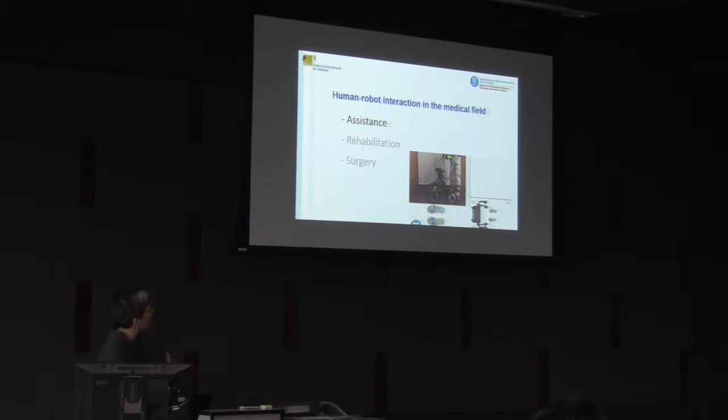For example, in assistance we have to deal with an external robot being an assistant arm that assists people in daily living, or other kinds of robots like wheelchairs or a smart walker that assist a user, elderly or so, to just go around. In rehabilitation...

the interaction is much closer because there is quite complete physical contact, mainly in this kind of exoskeletons, between the human and the robot, whose goal is that they cooperate. It's a cooperative task because we expect that the robot doesn't do everything.

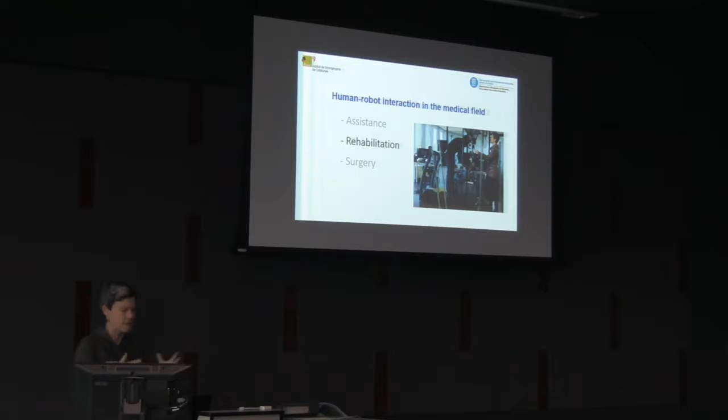We talk about exoskeletons, treadmills, or a combination of all of these with support for weight compensation, etc. All the things that exist in cooperation.

In surgery there are different problems, of course. For example, in this case we show robotic or laparoscopic surgery. Here the interaction is directly physical, the robot with the patient, or the instruments with the patient, but also the surgeon that is controlling the robot for the task. So there are two different kinds of interactions.

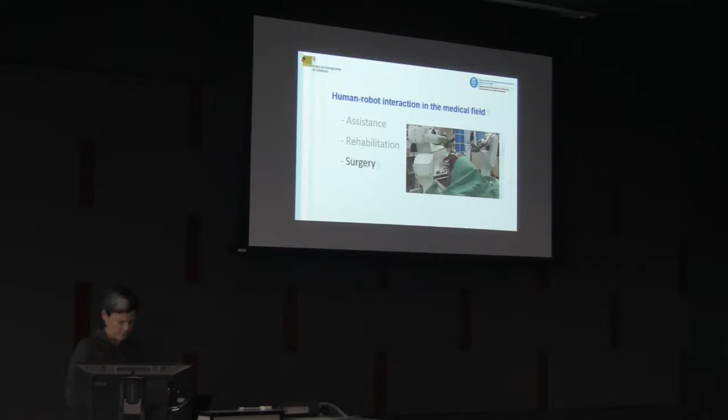So in this case, what is shown here is a lab scenario of the slave robot doing this laparoscopic task, operated by the surgeon. So we'll focus on the robot control aspects that we have to deal with, which are different from the more classical problems in robotics.

Just giving rough ideas: one is positioning, because many tasks are just about positioning the robot at some point. Others have to follow a trajectory, so trajectory guidance is key. And in other cases when we have contact with objects or with humans, there is the concept of force control.

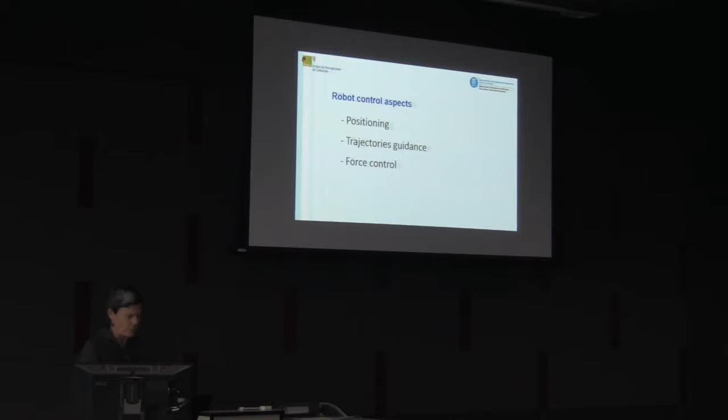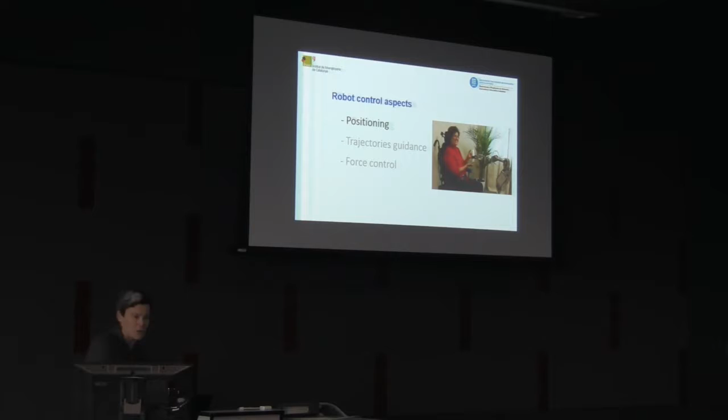If we focus on the other applications we mentioned, in assistance we have to deal with the user of this application. In some cases the robot is approaching something, and in most cases the user can facilitate the task because he can approach the robot. But in other cases this is not the situation: the disability may impede the user, or the user may even move meanwhile, so the robot has to adapt to the specific positions and situation of the patient.

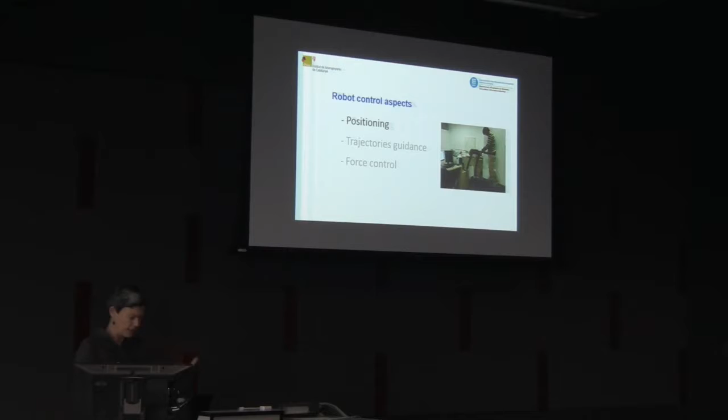In this case of rehabilitation, we have a user on the treadmill. This is a robotized treadmill that adapts the speed to the advancing speed of the user, so we have to detect precisely and continuously adapt to this capability of the user.

What is the problem of positioning in surgery? There are some applications in which we can predefine the position of the patient, like in stereotaxis applications, for example in brain or head interventions, where we can fix the position. So once we have established and calibrated the system, we know always where the patient is.

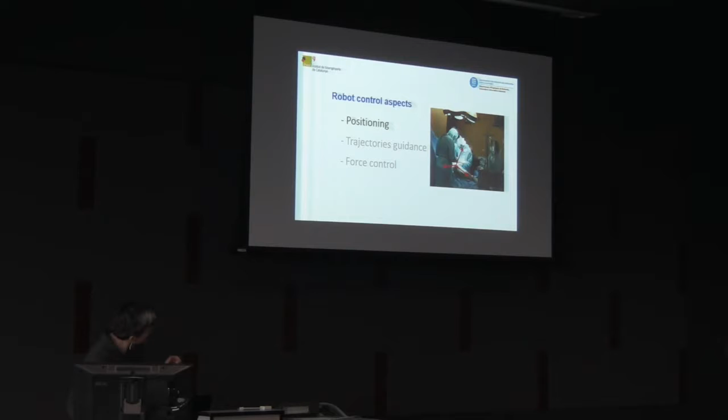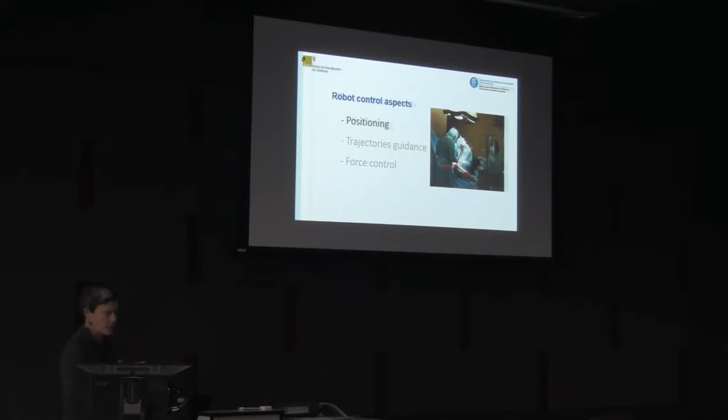The axis, in this case the leg, we cannot fix the position, or if we can, it's some invasive action fixing the position of the arm or the leg. So as much as possible it has to be avoided because it has shown to have clinical consequences later on. So there's still challenges in robotics to continuously and in real time position, to know, to detect the position and orientation of the patient, to be able to perform it. So we cannot.

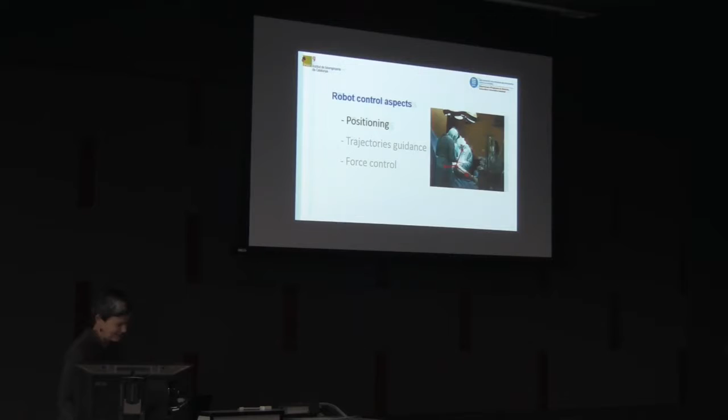So when one refers to trajectory guidance, again, it's the same thing. Referring to industry, coming back to welding actions, before was point-to-point welding, now is arc welding that needs a trajectory. In this case, either because the trajectory is quite established, or we have perception systems or vision to detect the joint, it is clearly defined.

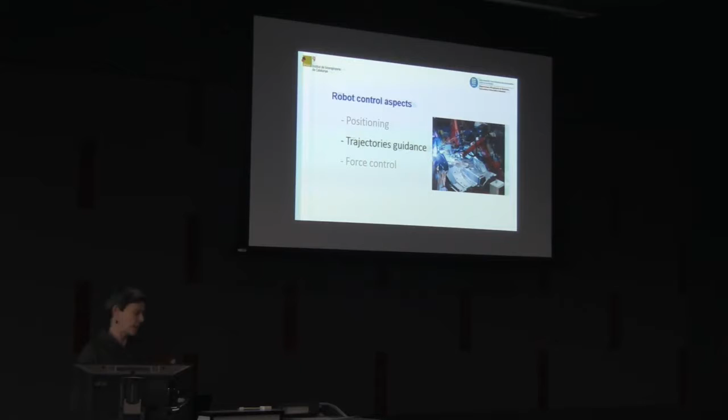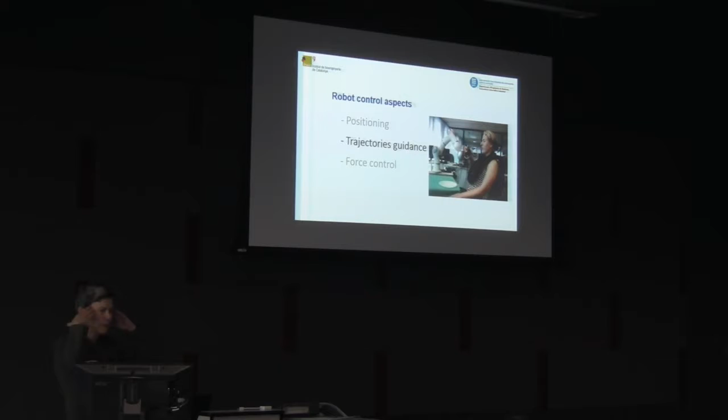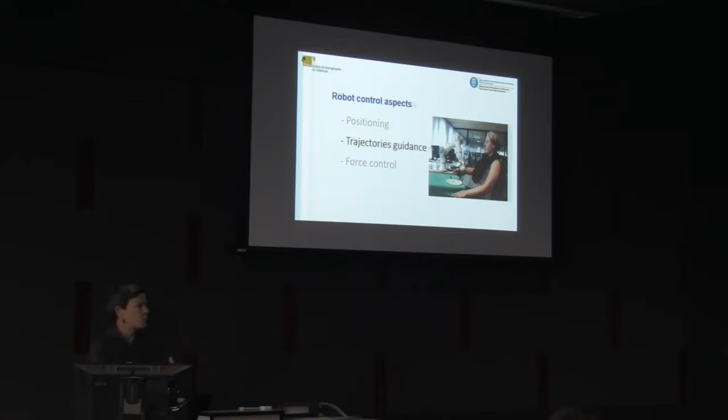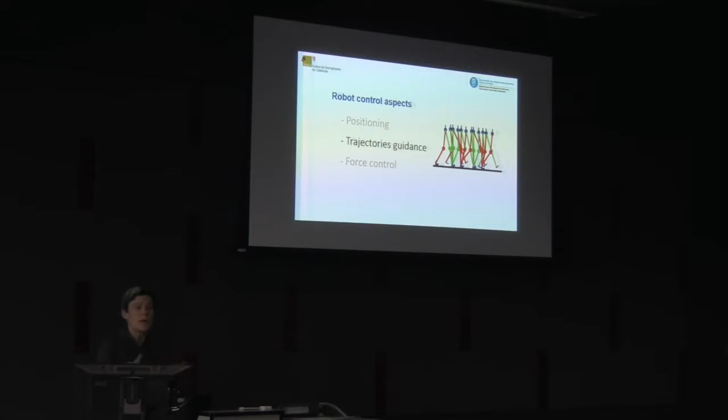The same happens in a walking process. The control of exoskeletons is based on the pattern of human gait, but everyone, due to different sizes or even due to different status, the spasticity, etc., may change not only from one person to another, but continuously for the same person. So the exoskeleton, the difference in humans and robots, has to continuously adapt to the status, and there are perturbations in this trajectory.

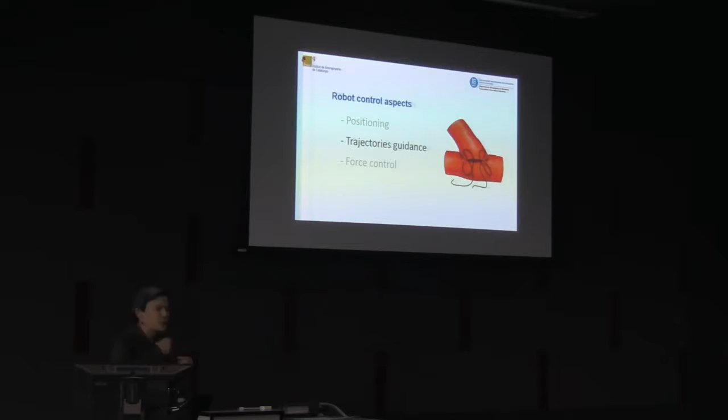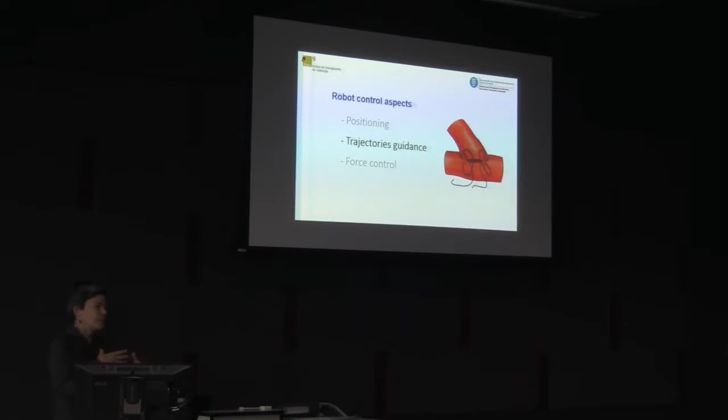In the case of surgery, it's the same again. There are many routine tasks, for example, surgeons complain that the advances of robotics are slow, and they do very routine tasks continuously, and they say why can't the robot do that. But of course, the size, the form of the cord, how the insertion has to be done, the state of damage of the tissues, etc., forces that some intelligence is there to do that. So there is a lot of work to try to fix parameters, to fix the things needed so that this routine task can be adapted to the specific situation at every time.

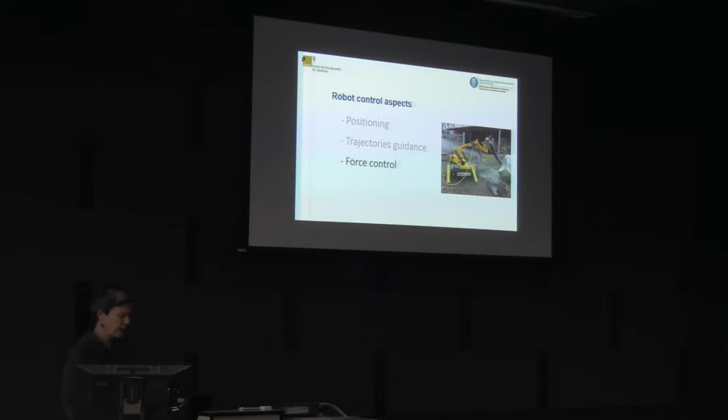And the other is for force control, where we are in contact, again in industry or in service. We have force control to do some tasks as here, drilling. And in the case of assistance, we have here a robot shaving.

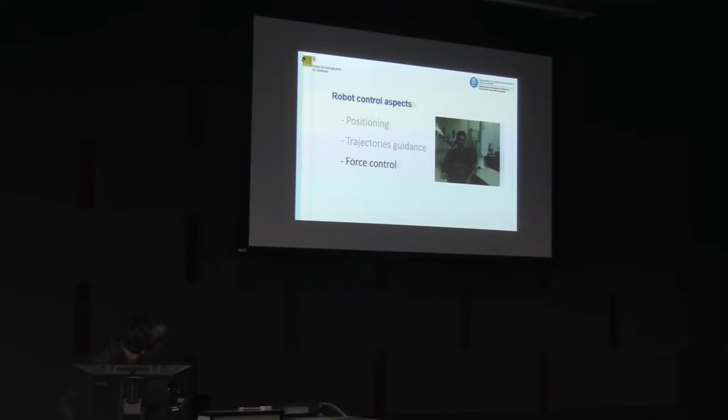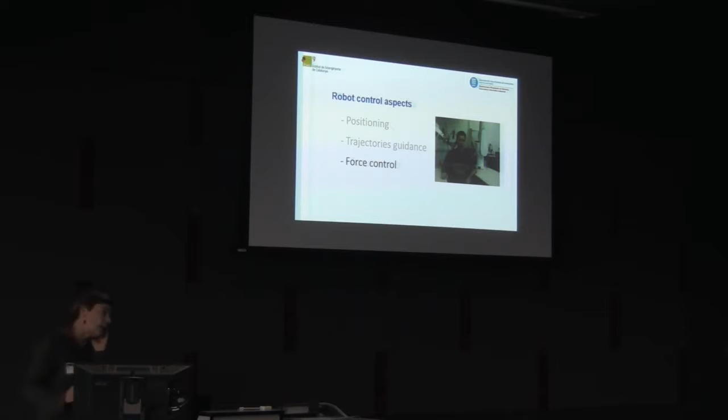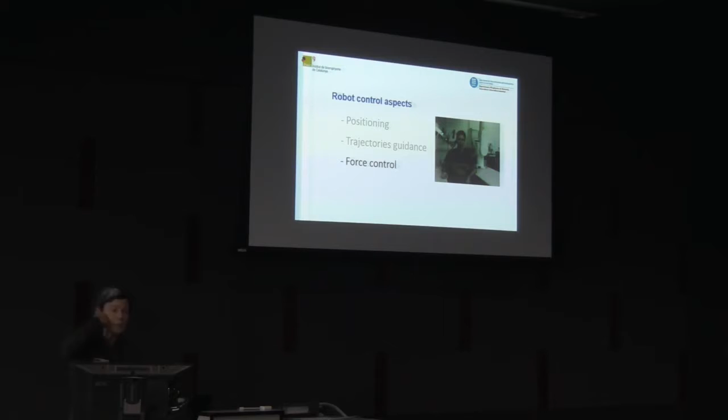Shaving robot. The shaving robot is adapting to the position, and in this case, even the human can adapt. So we have to establish a strategy. For example, in this case, the strategy was to move perpendicular, doing these actions perpendicular to the face of the patient, so it can adapt and do this.

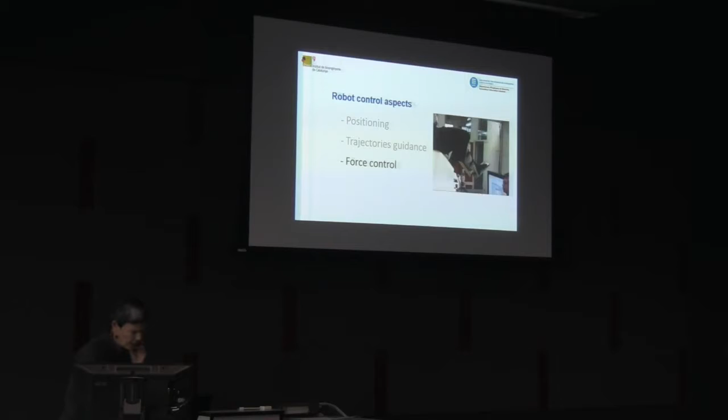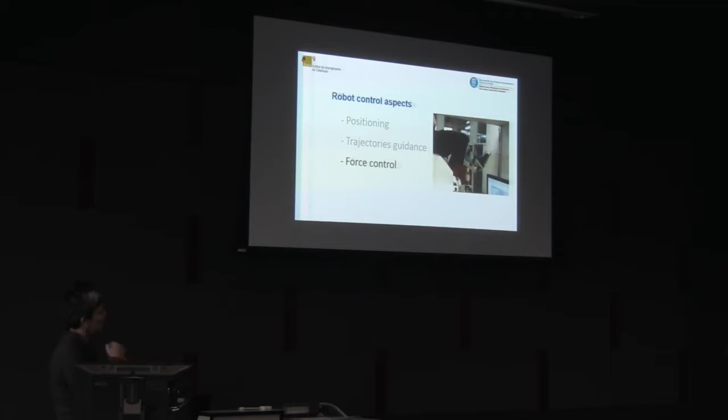The same in rehabilitation. In this case, we see rehabilitation not with an exoskeleton, but with a system arm. The therapist shows a trajectory, and by force control, we memorize this trajectory that has to be then repeated again and again, of course adapting all the necessary corrections that may occur due to the patient's status.

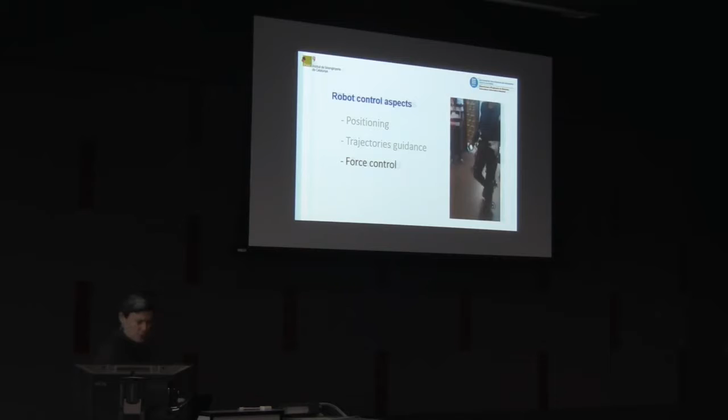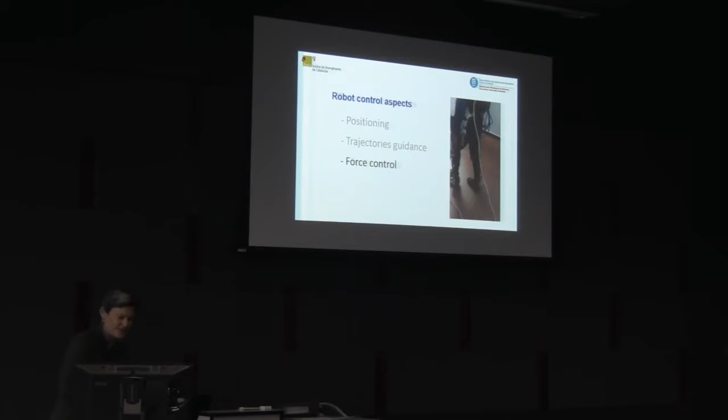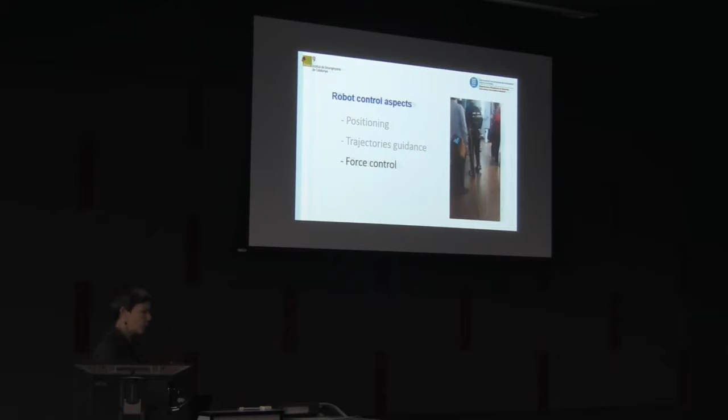The same for the exoskeleton. This is a type of project that we're working on, where the exoskeleton is applying this. In this case, the user is doing nothing; it's just the robot doing the action of walking. And so the work now is how to combine this so that the patient with different situations can contribute, so that we don't force this exact trajectory that may produce damage to the patient and so on.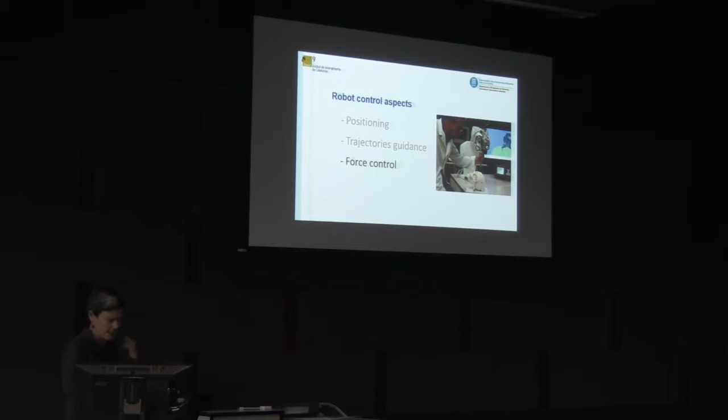As we see in this screen, we have generated a virtual fixture that helps the surgeon move towards the point of interest, and to impede the robot from reaching a specific point that can be dangerous, like touching a nerve or something that can produce damage, paralysis in the case of the medulla, etc.

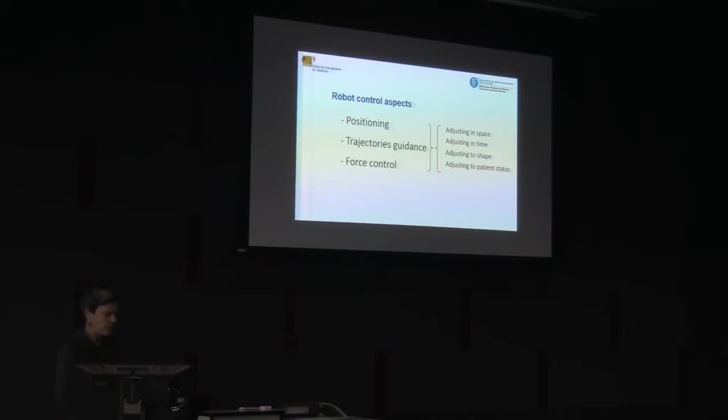So the problem we have to face is that we have to adjust trajectories, positioning in space, in time, as mentioned before this morning. We have to adjust in shape - for example in surgery all the organs differ, or in rehabilitation the shape of the patient is different, and also the patient status varies, and in any situation the patient can contribute more or less to what's happening.

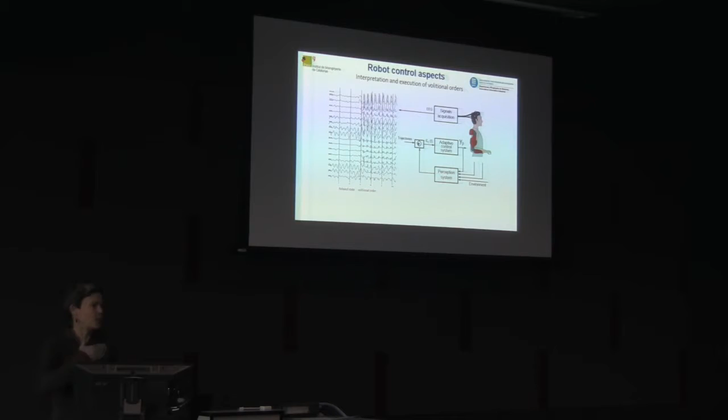So if we think of a system, for example in the rehabilitation field, a person has to control their arm orthesis or arm prosthesis just volitionally through mental orders. One of the things we find is that the orders are quite difficult to interpret. Here we distinguish between two real states: relaxed or in a volitional state. So basically, up to now, brain control of orders is just to start some pattern, not to control the pattern - we are still far from that.

But anyhow, in this case we still have a lot of doubts, a lot of uncertainty in interpreting orders. So these orders can be uncertain, and we have to evaluate if the interpretation done is good or not. So for that, it's interesting to analyze the environmental circumstances.

So we have to see if this interpretation, which is not very robust, is feasible within the external conditions, or even the status of the patient, or even the sequence of actions. There are many other inputs that together with the order will decide what to do, and this will correct if necessary.

From this information, once it is certain, we can say okay, we start this pattern of walking or reaching an object, etc. - typical actions for a system in daily life. But of course, this is what we have in a database: how is the pattern of reaching, how is the pattern of walking, etc.

But in any case, we will have to redefine this trajectory according to the status of the patient and according to these things. And this means that something happens here - it's not the typical control input-output, correct with a PID algorithm, and so on.

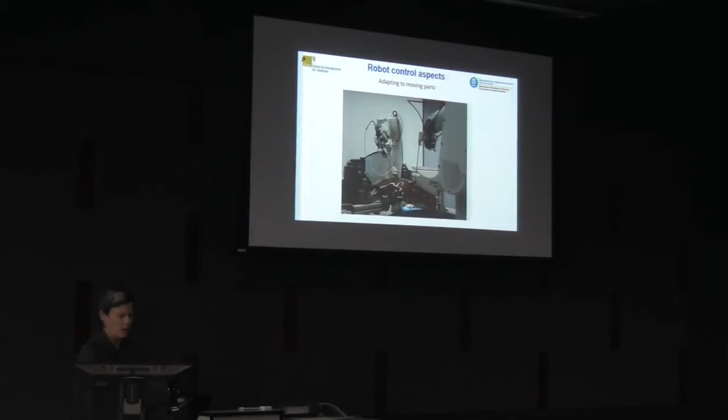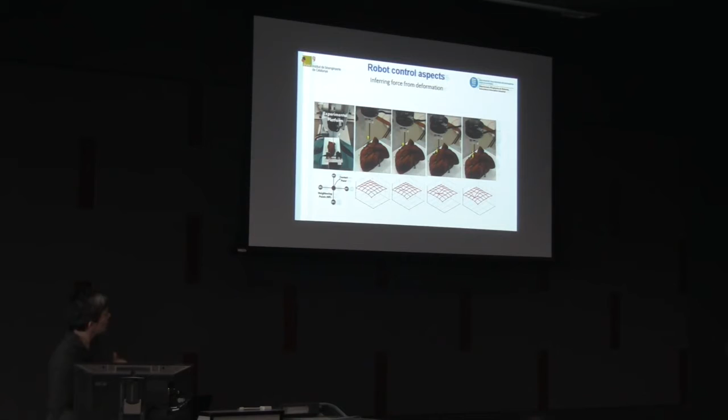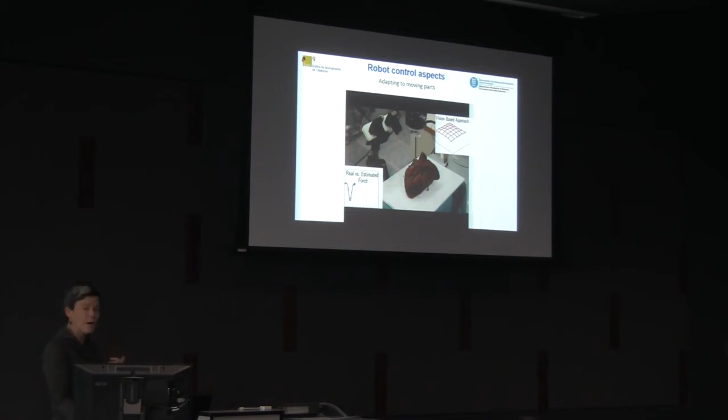We use this also for these studies on object deformation. For another of the challenges we have in surgical robotics, that is estimating force, as we cannot have force sensors on the tips of the instruments, we have to estimate it in a different way if we really want to feed back the force to the user. So in that case, we are combining what the force sensor detects as force, in order to infer from vision the force applied.

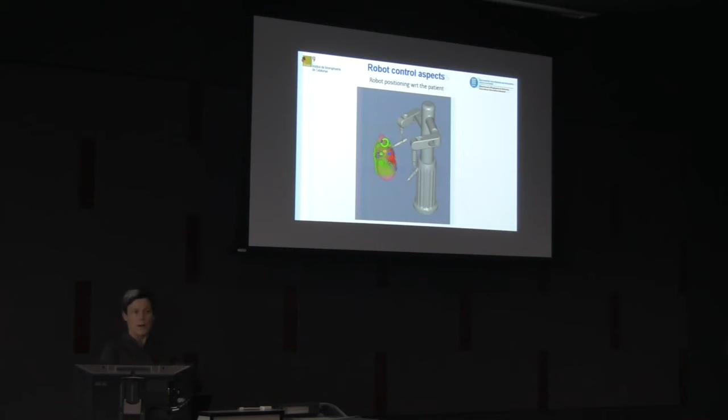And finally, this example of positioning: at the beginning of the intervention it is quite important that the patient is located in the right position with respect to the robot, in order to assure that the robot is able to reach all these points in space. So it is important to provide the information previously. So we are working with this interface for this interaction. We will compute previously for a given situation how it will reach. The surgeon can say, okay, I have to operate this way or this other, move the patient and so on. And so there are many challenges.